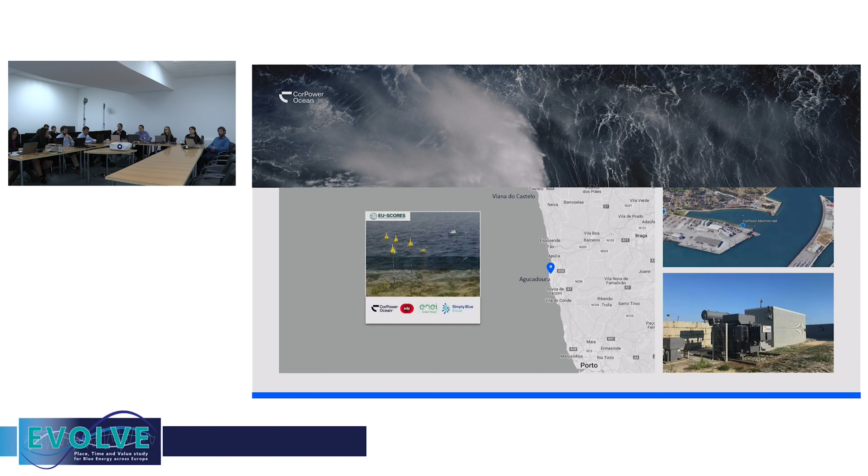So at CorPower, we have approached this challenge by really trying to understand what has been learned before, but also, what are the key challenges? And the way we look at it is you need to survive the storms, and you need to maximize revenue to cost. And the way we do that is we are developing a 5-stage program. We are now in stage 3, which is a full-scale grid-connected device in Aguçadoura in Portugal.

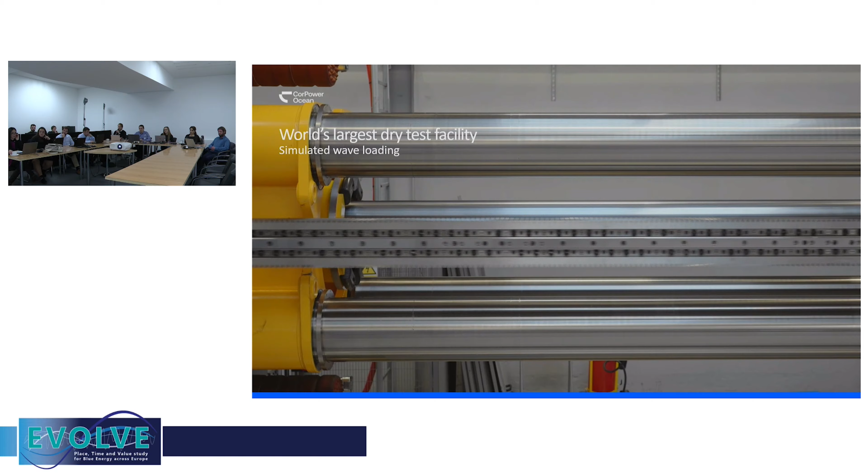And in Portugal, we have also developed what we call the mobile factory. So it's this type of manufacturing cell where we can manufacture the hulls and do the last integration of the PTO and hull, and then also use it as an O&M facility. Prior to this, we've done extensive dry testing in the world's largest dry test rig for wave energy. For about 1 year, we really pushed the power takeoff system and tried to break things and get the control system stable, etc., before we install it in the ocean.

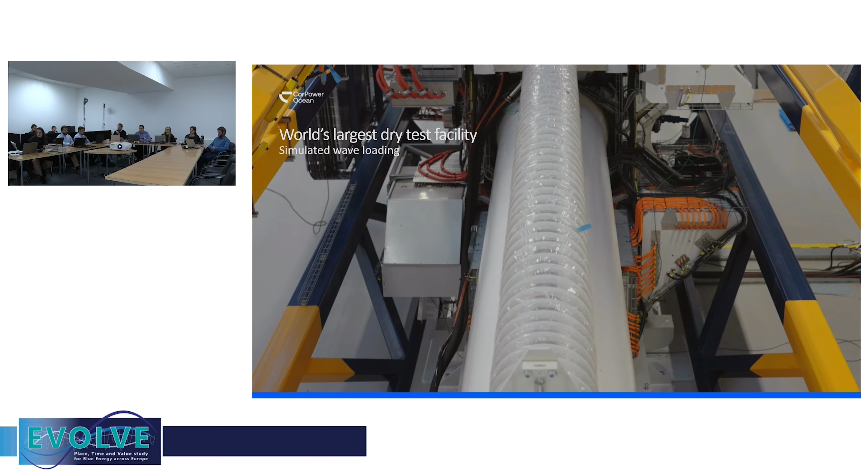And we have also installed the balance of plant, so anchor and mooring and new cables at the test site. And we have integrated the PTO into the hull in Viana. And it's currently sitting on the quayside up in Viana do Castelo. We've been waiting for weather windows, and it's ready to deploy. So I think by this, we just want to say that wave energy has come a very long way, and we are very close to commercializing wave energy to really get to a 24/7 renewable energy mix in the future.

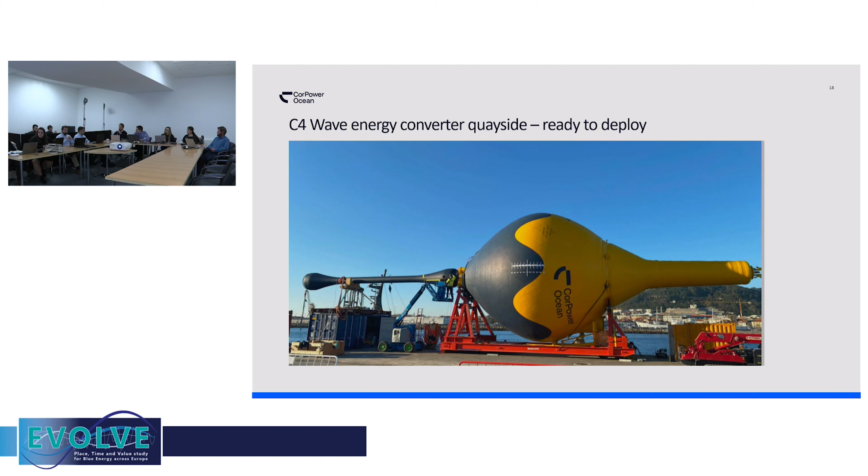So thank you. And I will hand over to James at Orbital. Thanks very much, Anders. So if you could just move on to my first slide.

Yeah, next one. So today I've got 5 minutes, so I'm just going to focus on the recent highlights for Orbital Marine Power, and some active projects we're involved in that really complement the objectives of the Evolve project and the wider commercialization of tidal energy. Next slide, please. So we've been developing our technology since 2002. But where we are now, we have the world's most powerful and largest tidal stream turbines. And over the next few years, we're going to be really seeing large-scale deployments of the technology, hopefully in line with the projections within the Evolve project.

Next slide, please. So this is our O2. This was launched in 2021 from Dundee. I think it was one of the first or one of the last vessels launched there since the 1970s. So really illustrating some of the economic opportunities associated with building our tidal turbines as well.

Next slide, please. So in the Evolve project, we focused on the grid systems modeling at a UK level. I just wanted to highlight that tidal stream energy is an entirely predictable renewable resource. It's got wide-scale application right throughout the world. So the conclusions of the Evolve project will have wide-scale replicable potential for a number of key regions right throughout the world in terms of decarbonisation and grid systems benefits.

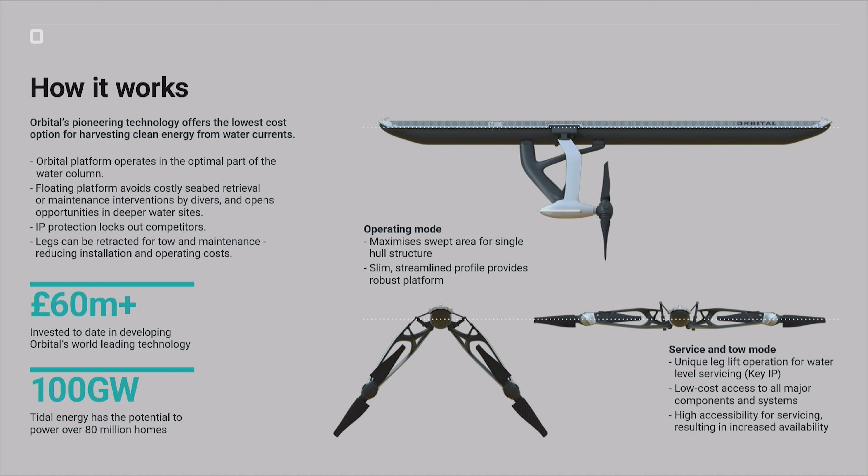where we can have that ease of access and low-cost maintenance. We have retractable legs now with the O2 that we can lift above the surface for ease of access to the nacelles and the pitching hubs, so all of those systems. And we can mount the rotors in the higher part of the water column where the tidal currents are the fastest for greatest tidal energy extraction. We've invested about £60 million to date in our technology, not including active grants and active initiatives. And as I said previously, there's a huge potential market of over 100 gigawatts globally for tidal stream energy. So an entirely untapped but vast renewable energy resource.

Next slide. So, recent highlights. We launched our first large-scale, commercial-scale turbine, the SR2000, in 2016. That was at times meeting up to 25% of Orkney's electricity demand.

It was installed at the European Marine Energy Centre there. It validated the technology approach at full commercial scale, and allowed us to raise funding, including from the Scottish Government, for future optimizations and future units.

So we launched the O2 with Horizon 2020 and Scottish Government funding in 2021. That's installed at the European Marine Energy Centre now in Orkney, and performing very, very well. And it's really demonstrating the more optimized commercial offering associated with our tidal technology.

Over the next 3 to 4 years, really what we want to do is continue to innovate on the technology. We're really now starting to build that global pipeline of new commercial projects in line with the predictions associated with the Evolve project. Next slide.

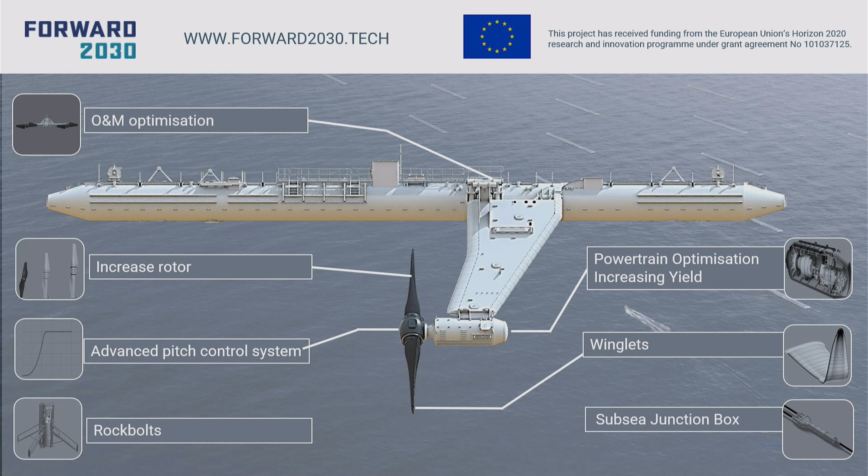So I'm just going to focus on 2 active initiatives we're involved in that complement the Evolve project. The first one is Forward 2030, in association with partners like SKF, University of Edinburgh, EMEC, Laborelec, and others. And really, this is about, firstly, continuing to innovate and drive down the cost of the technology. We're not keen on these long learning rates to get the costs down.

We want to maximize benefit to the taxpayer, really get those costs down through innovation as fast as we can. So we've picked 7 priority cost reduction innovations to focus on in the next project to reduce our generating costs and the cost of the sector by a further 25%.

Next slide then. And we're doing all of this with respect to future energy systems. So when I say that, we're envisaging, and this again complements the Evolve project, but at a project level, looking at decarbonizing other sectors, looking at not just exporting to the grid, but doing that in a grid-friendly way, making best use of the grid, and then also considering synergies with other harder to decarbonize sectors such as transport. So looking at hydrogen production as well, and how to balance all of that and how to manage that as part of an integrated project.

So again, looking more at the project level, whereas Evolve looks at the wider systems level and amalgamating all of those benefits. So I've got one final slide. And another project we launched last week is the MaxBlade project. This is another Horizon Europe project, a €10 million award from Horizon Europe and the UK Innovation Agency.

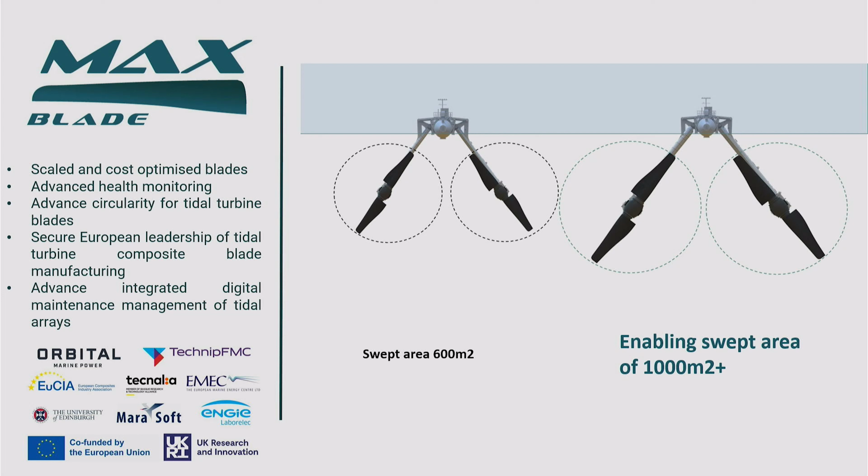Over the next 2 to 3 years, we're going to take all these innovations and implement them into a single core product, and really focus on that wide-scale deployment as in the Evolve project, and really realizing those economic benefits, those grid systems benefits, and the wider societal benefits as well.

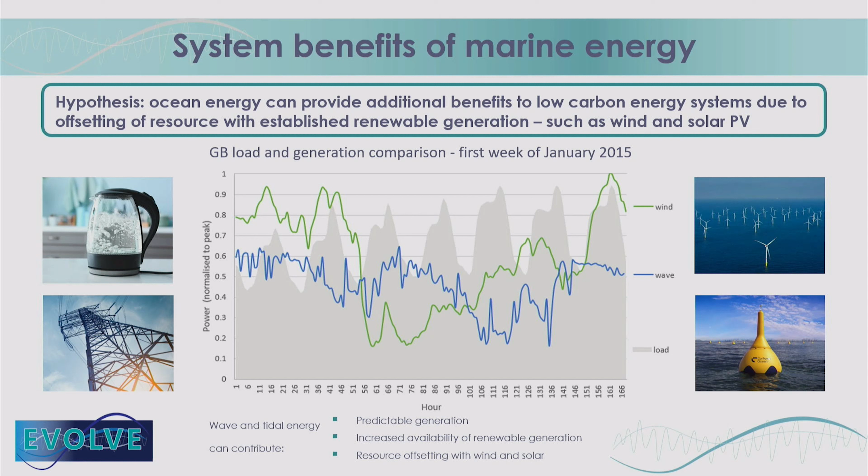We were trying to answer whether ocean energy, wave and tidal energy, can provide additional benefits to low carbon energy systems. So we all know that both wave and tidal energy are predictable, or at least more predictable than other sources. We know that if we include them into the system, we will be increasing the availability of renewable generation. And we also know that they have a nice offsetting with wind and solar.

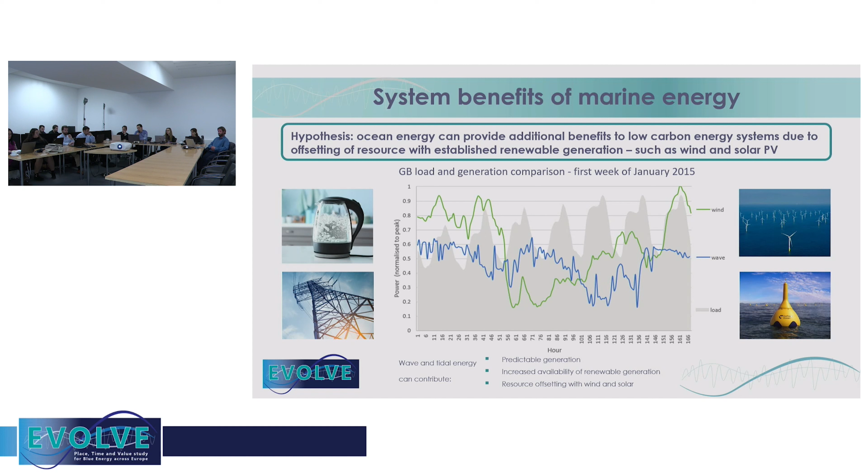So what we try with this project is to answer the question of how much of a benefit we will get from there. Which are those benefits, and how can we quantify them? So for that, as Miguel explained at the beginning, we created a consortium.

We applied for funds to the OCEANERA-NET COFUND second call in 2019. So we are 6 different companies from Scotland and supported by Scottish Enterprise. Aquatera, which is an environmental company and technical consultancy, is leading the project, and also working together with the University of Edinburgh and Orbital. With the support of the Swedish Energy Agency, we have CorPower Ocean and RISE Research Institute. And then for Portugal, of course, we have WavEC, who are kindly hosting the event today.

So we've been working in this project for 25 months now. We started back in January 2021. The project has an overall budget of around €1 million. And we've been delivering 7 different work packages with 22 deliverables and 50 milestones, the last of which is this webinar we are celebrating here today.

So to answer that question, we did 3 different types of modelings that we will be explaining now in detail. We work on a spatial modeling led by Aquatera, also with the support from WavEC. There will be some results shown also, of course, on the power system modeling done by the University of Edinburgh and RISE, and some microgrid studies led by WavEC. We will have now a specific section of the presentation focused on each of those modelings.

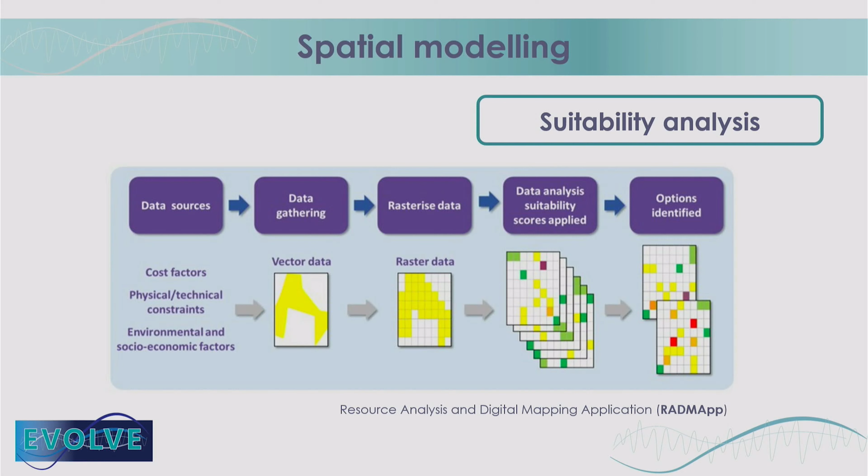And we also have to deal with data that comes as text, which might be able to be represented spatially from coordinates that are in that text, but also data might only be available in a digital image or a map, which we then have to look into digitizing. But what is uniform, however, throughout all this is that all the data that we use has to be represented at this 250 meter resolution raster grid. And once that data has been uniformly rasterized, then the analysis can begin and the model run. Next slide, please.

So each data set you see there is rescored according to the instructions provided by the score sheet. And that determines whether there's any impediments to development, or if development is possible, the level of suitability for development. The model employs a multiplicative approach. So suitability scores are assigned on a scale of 0 to 1. So some data will impact on development's potential in a purely Boolean way. For example, the presence of a pipeline might be an absolute barrier to development.

So in that case, cells with a pipeline in them would be assigned a score of 0, and those that don't have a pipeline in would be assigned a score of 1. So in effect here we're saying cells are either yes or no to development. Other data though impacts in a different way and has to be scored in a different way. So if you're thinking about bathymetry, there are water depths that are too shallow to accommodate a device, and we know there are depths that are too deep to feasibly anchor a device. So in these areas, a score of 0 is applied, because again, it's not possible.

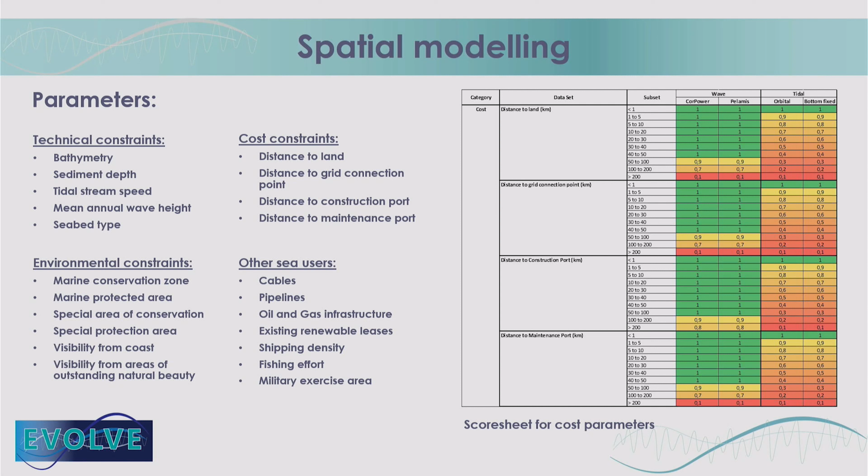So once all the data layers have been reclassified based on the score sheet, each layer is introduced to the model and all the layers are multiplied together to provide an overall suitability value, as you can see on the right-hand side there. So because of the nature of a multiplicative approach, areas deemed as a barrier to development, so those that are assigned a score of 0, will rule out any areas, even if every other factor that's gone into the model is 100% suitable. Just one unsuitable score of 0 will wipe that area out completely.

So the area scoring 0, which the key probably isn't legible on your screens viewing the webinar, but the areas that are blue in the waters around there are what we would determine to be not developable. But the other areas that are in there have some level of suitability, with the areas getting towards the reds being the most suitable. But I should point out that anywhere that's not that brightest blue has some level of potential.

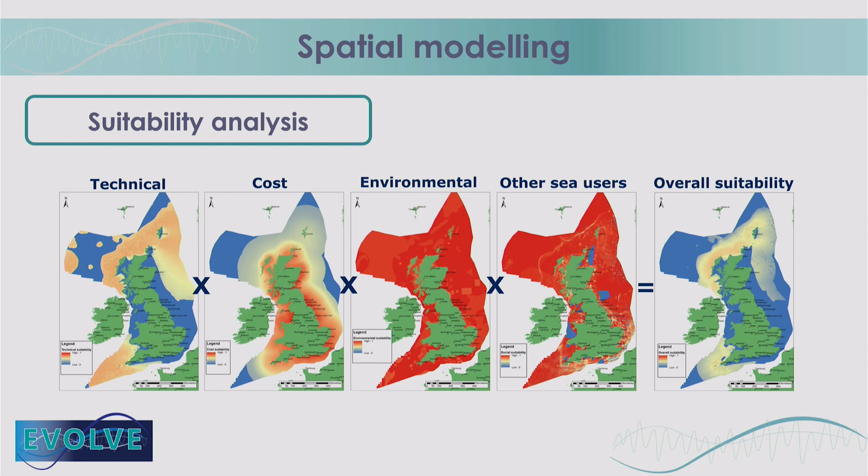Okay, next slide, please.

So one of the biggest challenges we had within the spatial modelling was determination of resource potential for both the wave and tidal stream. For tide, previous spatial models that have been created for countrywide levels have produced outputs that are quite coarse in resolution and can be quite poorly resolved or even missing data when they come close to the coast. And given that the majority of tidal streams are in channels and off headlands that are close to the coast, this isn't particularly great.

So to supplement the existing tidal models, we've over the years collected data from various nautical charts and sailing almanacs, etc., to supplement where potential tidal areas might be.

For wave, it's also true that these countrywide models are pretty poor resolution and lose resolution and miss data close to the coast. And also for wave, unlike with tide, there's not that direct relationship between the speed of the water and the power output. With wave, there's a combination between the wave height and the wave period. Previous models for wave normally provide us with maybe an annual wave height or an annual wave period, but that doesn't really give us the best way of calculating potential power output from a device.

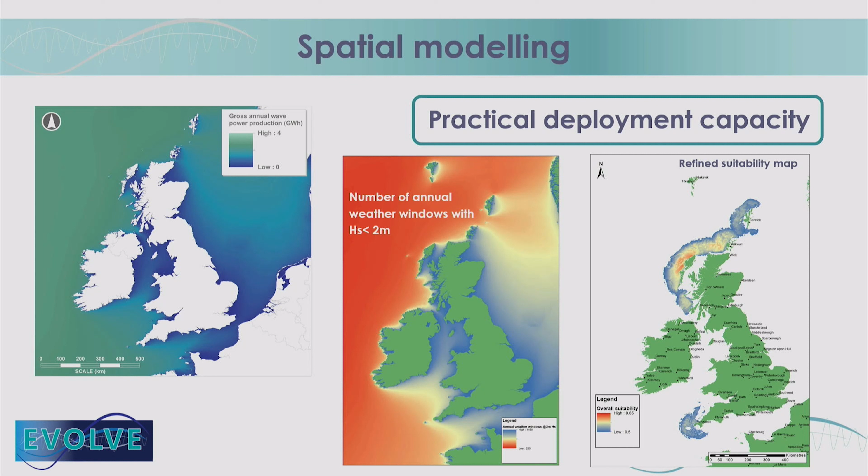The same with the tide, we can't just completely block off the tidal stream with lots and lots of devices. So we had to take into account device spacing and how much energy could be extracted from the resource. That was then used to define final areas for development and gives an estimation of potential installed capacity for the various regions. Next slide, please.

Okay, so this is now getting on to the results from the spatial modelling. So this is for Britain.

So this just breaks down the map on the left here. It's showing us the potential areas for wave development, and based on what I was just saying before about picking the top sites and where the wave resource could be captured, we were coming out with the following figures here in the different areas around the British coastline.

So going from north to south, we've got to the west of Shetland, west of Orkney, Lewis and Cape Wrath up the northwest there of Scotland, the Outer Hebrides, the southern Inner Hebrides there just above Ireland, and then coming down to the southwest around Cornwall and the Scilly Isles. So that gave us a total installed capacity of just short of 25 gigawatts for British waters. Next slide, please.

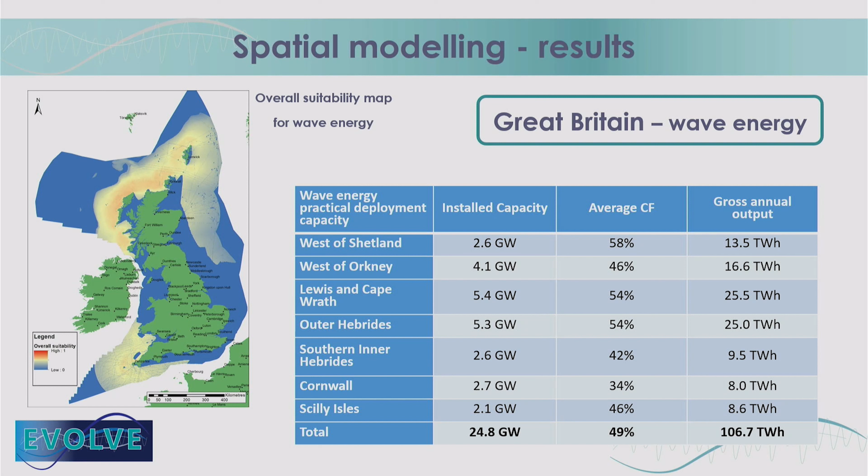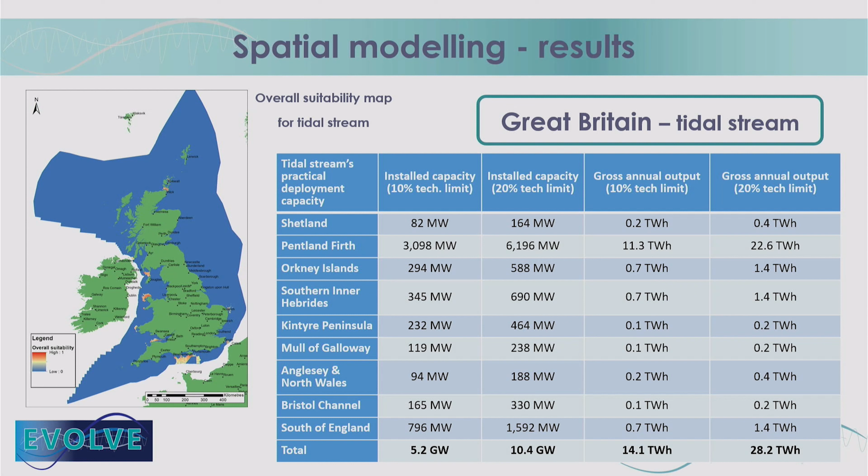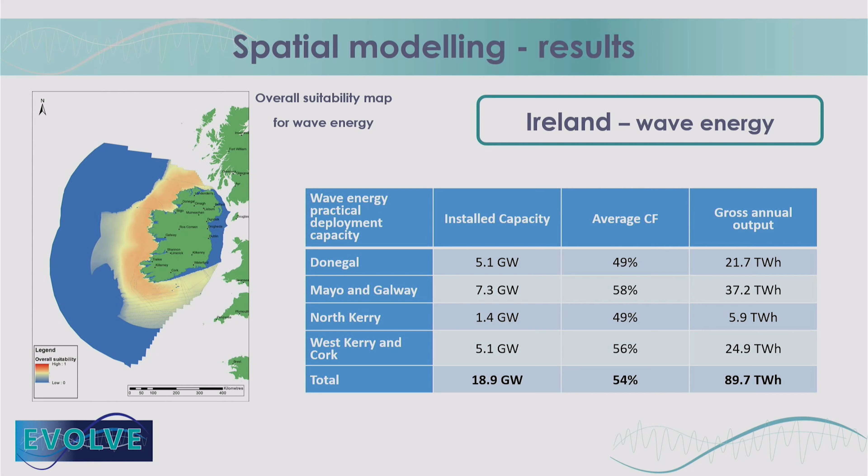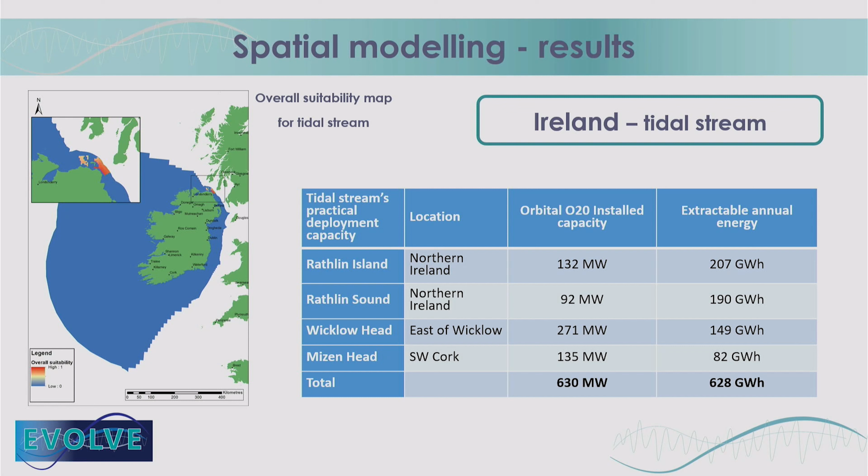They're quite small areas around Wicklow and southwest of Cork, but we're getting around 630 megawatts of installed capacity for Irish waters. Should say that there's potentially more capacity in parts of the Irish waters, maybe if we're looking at sea loughs, which we didn't look into as part of this study. Next slide. Okay, and finally Portugal.

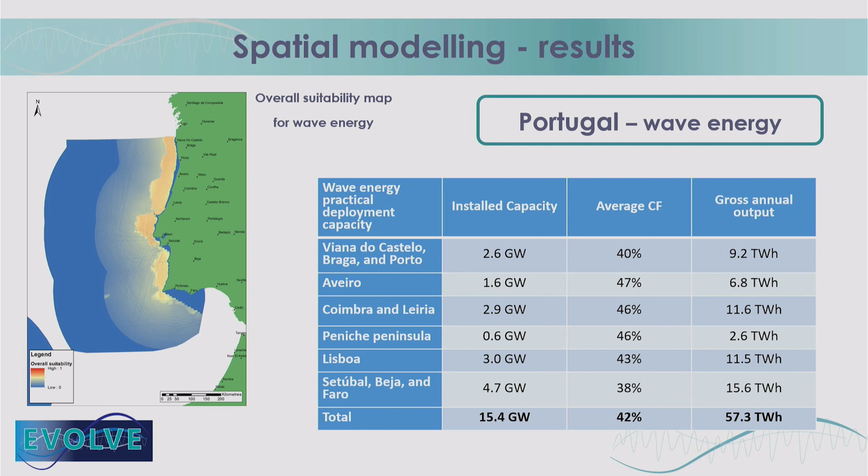I think that's my last slide for the spatial modelling that Aquatera did as part of the RADMAP. I think I'm going to hand over to Miguel now at WavEC to talk about their Oasis model. Hi. So I'm talking a little bit about the WavEC model. The Oasis model is our site selection tool.

So the model from WavEC uses cost functions to reclassify the aspects associated with different locations' characteristics, and basically it calculates the most suitable areas for wave and wind energies, considering the annual energy production, total costs of installation and maintenance, and taking into account the existing constraints on the different locations. During the Evolve project, we were able to develop the tool for wave energy and improve some of the cost functions that the tool uses.

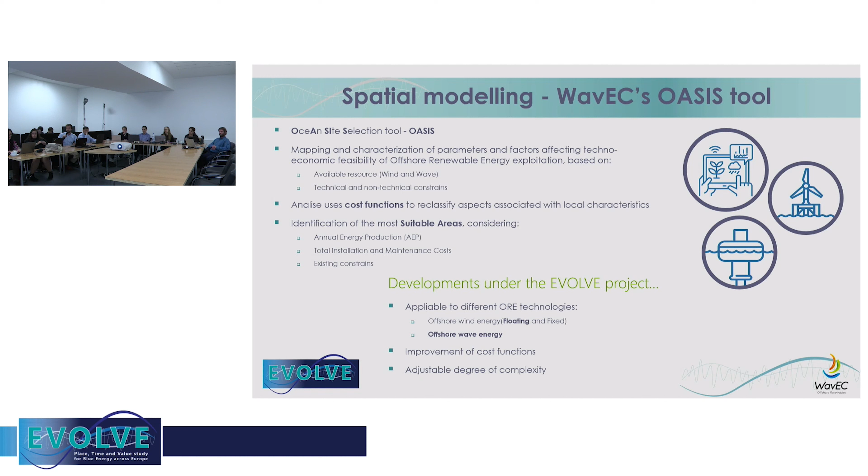So basically the cost functions calculate a suitability index that takes into account the total costs over the AEP, the annual energy production, and this total cost takes into consideration costs associated with the energy converters, the substations, the OPEX, mooring systems, the array cables, and the export cables. It also takes into account data associated with the water depths, the seabed sediments, the distance to ports, and distance to the grid connections.

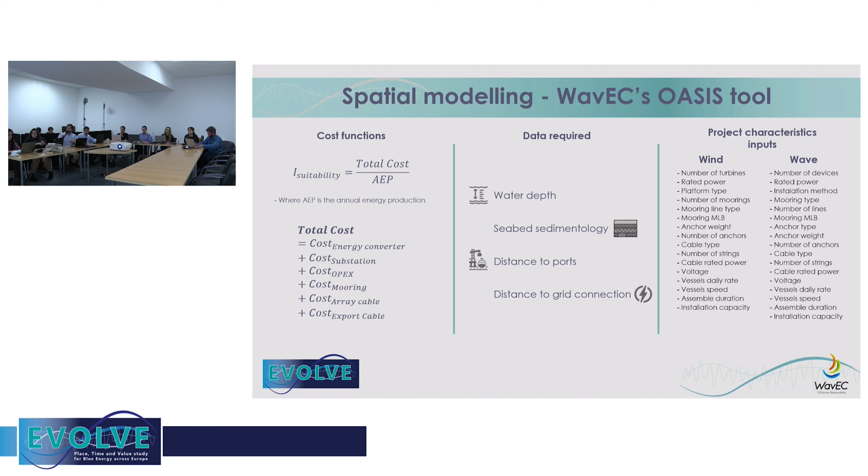And it also requires inputs from the projects. These are more specific to each project. And for wave energy, we can have inputs like the number of devices, rated power, installation methods, and so on. The different outcomes of the tool.

So the most important one is the suitability index that is going to give us an idea of the best sites for installation. But we can also have maps associated with the different costs of the different processes of the installation and maintenance process. We can have maps associated with the different constraints, and we can have final maps with the suitable sites, identifying the most suitable areas for the specific area under study.

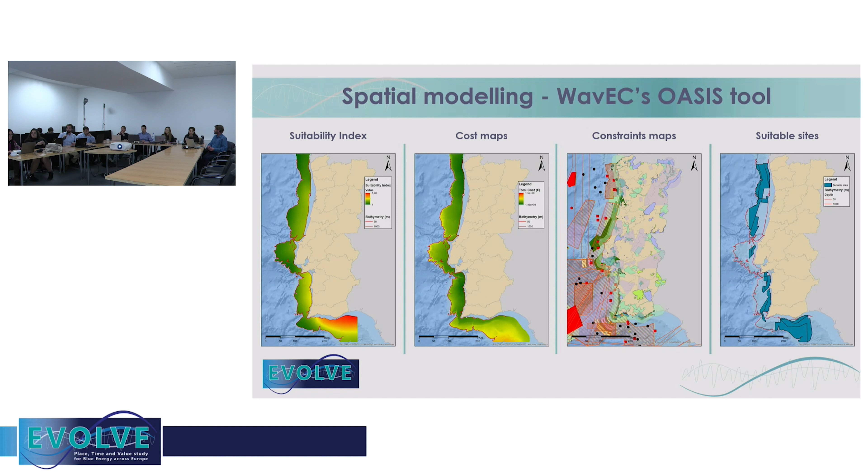And yeah, we are still developing this tool, and we are hoping to develop it for other sectors such as aquaculture, floating wind, floating solar, and improving all the costs and other aspects of this tool.

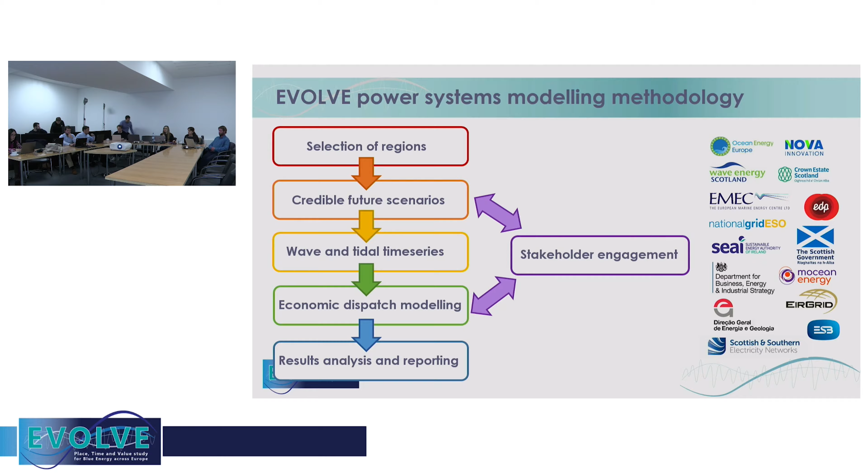So in terms of the power systems modelling we've been doing, I'm just going to chat through a little bit about our modelling methodology and the different steps that we took before then moving on to some of the results, starting off in terms of country scale studies. So as we said before, selecting regions, we looked at Great Britain, Ireland and Portugal.

We then looked at any potentially credible future scenarios for these regions. So we looked essentially at grid operators, at governments, all the analysis that had been done to see what the potential future energy mixes could look like in these regions all the way up to 2050. We also took a bit of time to analyse the wave and tidal resource, the hourly time series in terms of the availability of these resources for each of our regions.

And we fed all of these data, so the scenarios and the resource time series, into our economic dispatch models. Throughout all of this, we've been lucky enough to have quite a lot of stakeholder engagement. I've given just a few examples of some of the organisations we've been engaging with over the last couple of years. And thanks to everyone who's given us feedback. It's been really useful to get engagement from stakeholders and validate some of our assumptions and our modelling methodologies as well.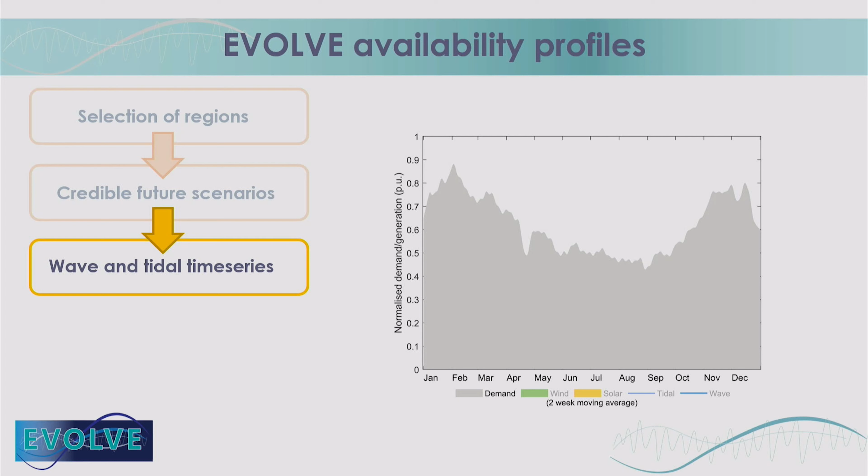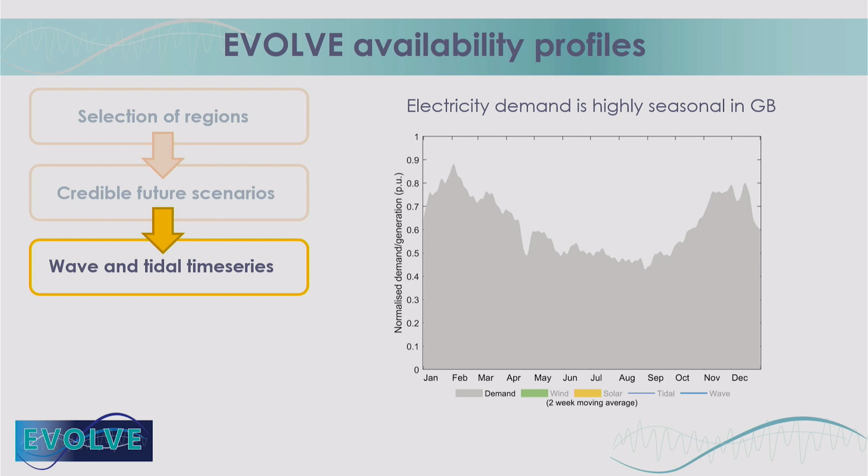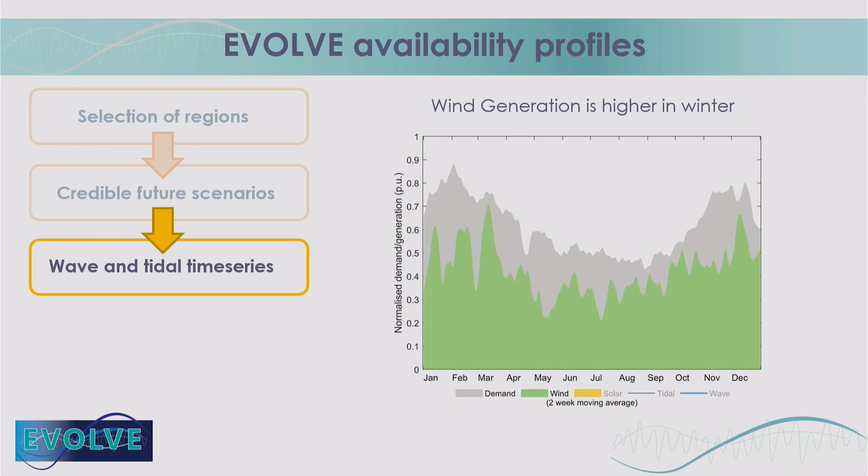So, for example, this graph here essentially shows the seasonal electricity demand. We have much higher demand for Great Britain in the winter months. It drops a bit in the summer. When we then compare what the normalized wind generation looks like, so we're comparing the seasonal profiles for these different technologies here, wind here is made up of both onshore and offshore wind for Great Britain. We see again that we have quite a seasonal resource here. We have much higher peaks in wind generation in the winter months, and our lowest troughs in the summer months.

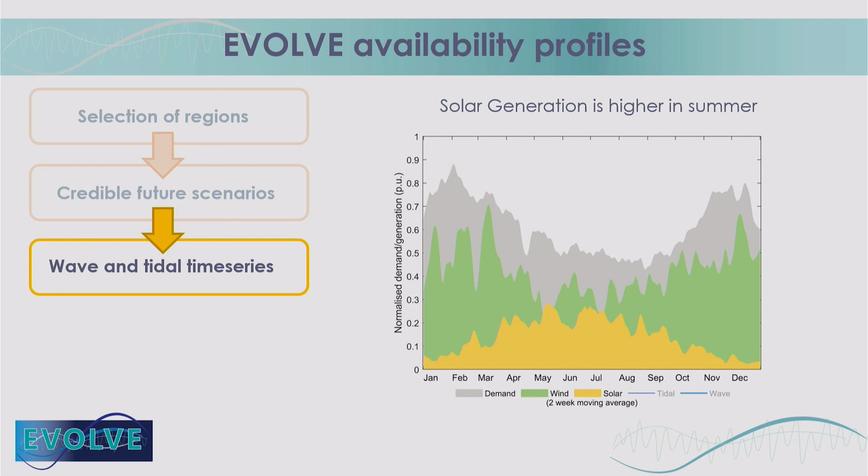Solar obviously is the other way around. We get a lot more light, a lot more sun in the summer months in Great Britain. So we see that peaking in the summer and dropping off in the winter. And then we start to look at our ocean energy resources to compare these with the established generation that's already in our systems.

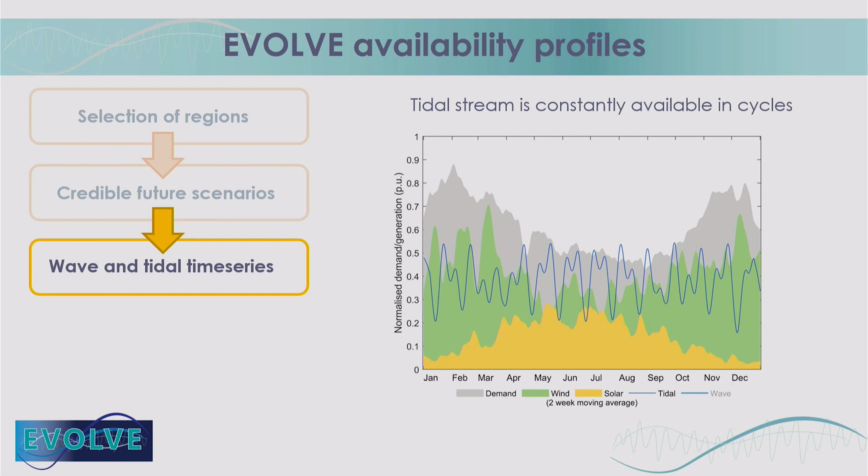What we can see is tidal stream is available more consistently throughout the year, it's predictable, and we can predict the cycles when tidal stream generation will be available. Wave energy we find is also much higher in winter. It matches our peak demand actually pretty well for this year of data for the UK system. What we do see is there are points where we could have, say, a high wave resource at a point when we have a low wind or solar resource, and vice versa as well.

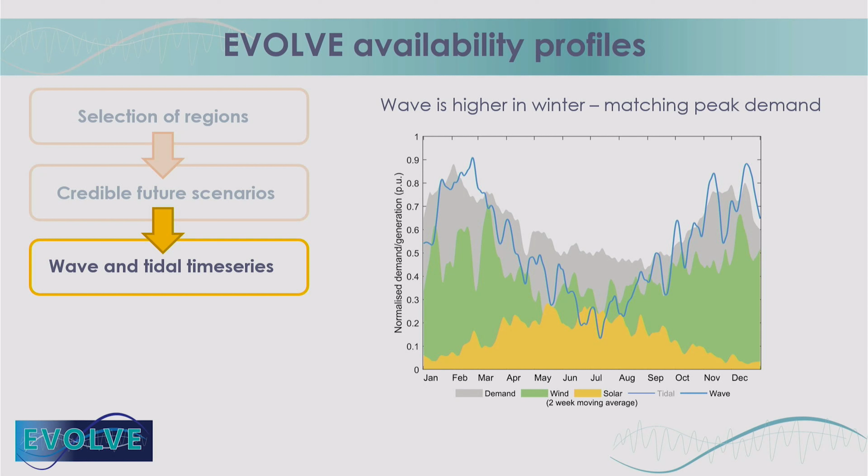So as we've highlighted in this webinar, the key hypothesis of the work really comes from the fact that these resources are offset, and potentially a more diverse mix, which includes both wave and tidal alongside wind and solar, could be better suited to meet our demand profiles than just one of these technologies in isolation.

So once we've collected all this data and understood why it's interesting, what we then did was feed it into our economic dispatch model. We used open source software called PyPSA, Python for Power Systems Analysis. This software computes hourly optimal dispatch. So for every hour of the year, for selected years, we're essentially trying to meet demand with supply at the cheapest cost. Generation can bid in at its short run costs, for example, taking into account fuel costs and operational costs of generation. And this represents wholesale market operation.

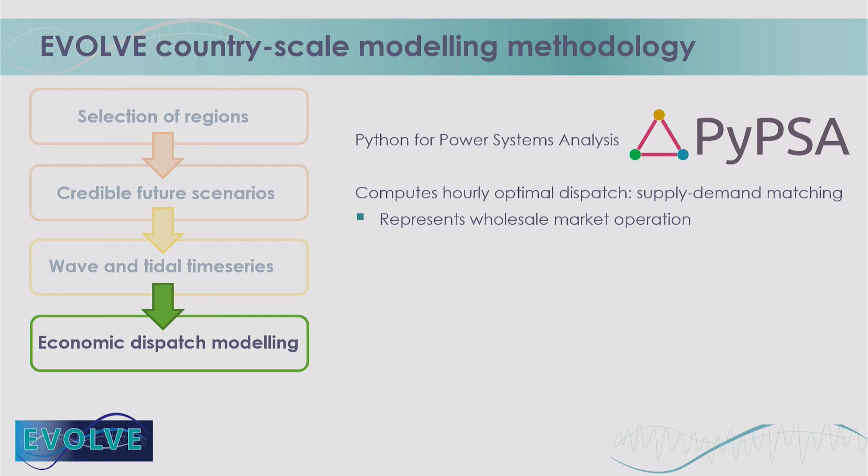So I'd highlight in this part of the power systems modeling, we're not representing any capital costs or investment costs in the system. What we're looking at is specific years, for example, 2030, 2040, 2050. We've taken an established mix from a credible future scenario. And we're adjusting the amount of wave and tidal generation within that electricity mix, and looking at how that impacts on system operation and dispatch.

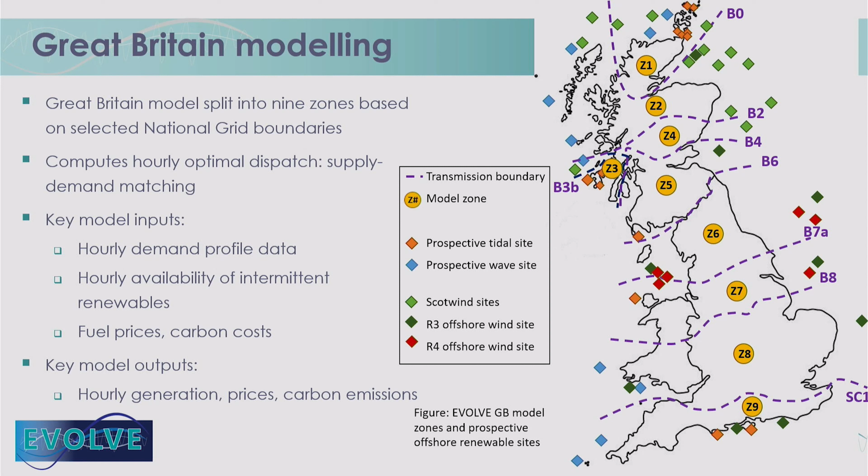And we used the hourly availability of intermittent renewables, so wind, solar, wave, and tidal, again from the same year, so using the exact same base year of data to capture the correlation between these different technologies and with demand as well. We also used fuel prices and carbon costs taken from the UK government electricity cost projections. Our key model outputs are the hourly generation, the hourly dispatch of different technologies that the model chooses to dispatch to minimize costs. We look at how that changes in one scenario without any wave and tidal generation, and then a scenario as we increase the amount of wave and tidal in our mixes.

So what do these results look like? This shows our results for Great Britain. So wave results are on the left-hand side of this plot, tidal results are on the right-hand side. At the top, we've got our cost, and what we've done here is just shown the change in dispatch cost between a scenario with no wave and tidal, and then our scenarios as we increase the proportion of wave or tidal energy into the GB system.

So what we are seeing is, for each of the different years that we've been looking at, 2030, 2040, 2050, as we increase the proportion of wave and tidal in our system, dispatch costs overall are steadily reducing as we're increasing the ocean energy technologies. And this is because, as I mentioned, we're able to displace more fossil fuels. We can see in the lower two graphs, we're also reducing the amount of carbon in the system. And that's because we're displacing more carbon-intensive generation, potentially more expensive generation in our system as well. And on an hourly basis, we're able to use more of our renewable energy at the time that it's available, and therefore reduce our total dispatch costs for our system.

So just to pull out a couple of figures from these graphs, after 10 gigawatts of wave energy, for example, we see up to almost £1.5 billion reduction in dispatch costs for the year. And we see around a megaton, so 1 million metric tons of carbon dioxide reduction as well.

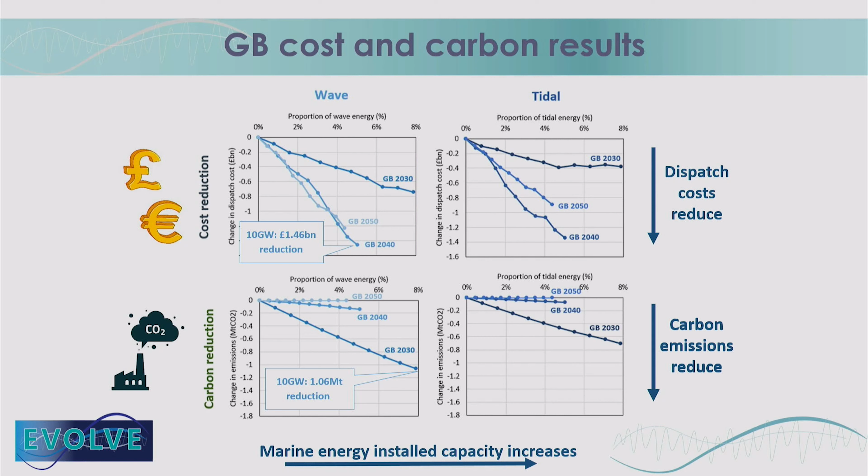I think that might be... Oh, one more slide from me, and then I'll pass on to Elena to talk about our Ireland and Portugal studies.

So another thing we're able to do, as I mentioned, our modelling represents our wholesale market. We're able to look at which technologies can capture which prices, so when technologies are available, looking at the marginal price, representing our wholesale price for every hour as a result from our modelling. What we are seeing in these results, again for every year we've been looking at, these are GB results, is wave and tidal able to capture higher prices than solar and wind.

And this is essentially because there's a lot of wind and solar already in our systems. When that is available, it tends to depress the overall price of electricity. But wave and tidal are able to be available at times when potentially we have more expensive peaking generation or fossil fuel in our systems. And therefore, in the short term, as we increase penetration up to 1, 2, 3, 5%, we're able to see these technologies are able to capture higher prices.

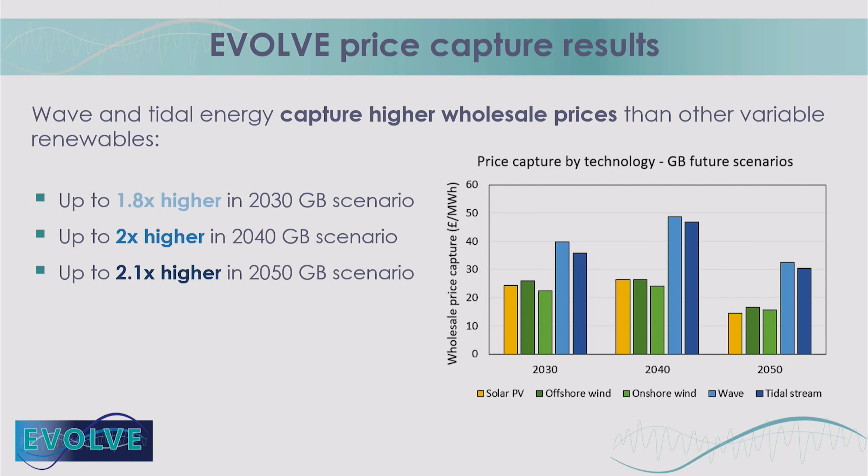So yeah, I'll pass on to Elena now, who'll talk about the Ireland and Portugal modelling. Thank you, Shona. I'm Elena Vardanyan from Royal Institute of Technology, and as it was mentioned before, we have been also modeling Ireland and Portugal.

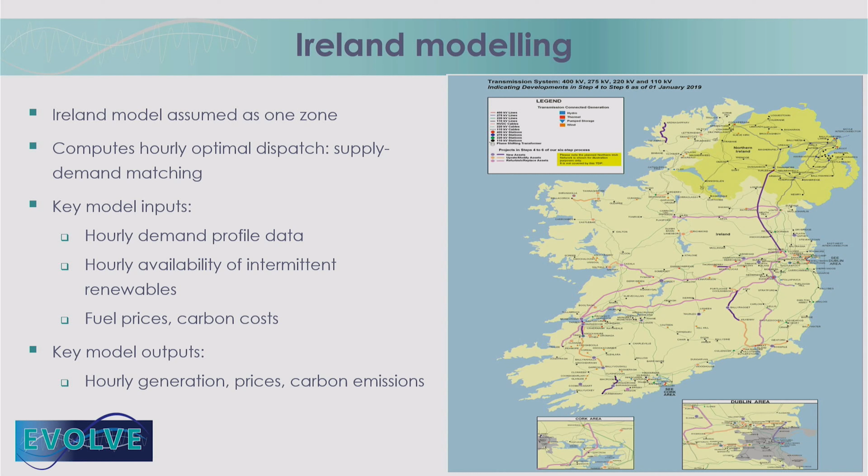So for Ireland, an economic dispatch model has been developed, considering Republic of Ireland and Northern Ireland as one zone. We have chosen 2030 and 2040 as reference years. For the economic dispatch model, input data has been collected and gathered: time series for hourly demand for Ireland, time series for renewable energy resources with hourly resolution, fuel cost, carbon cost, and of course key model outputs are marginal prices, carbon emissions, and hourly generation.

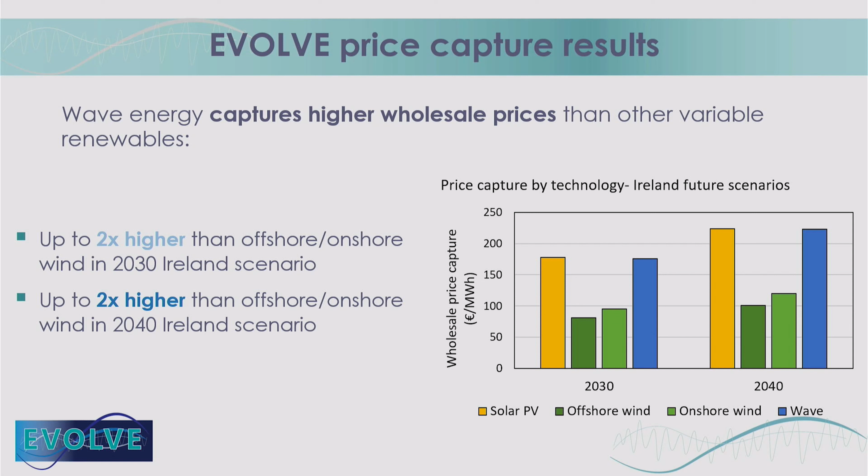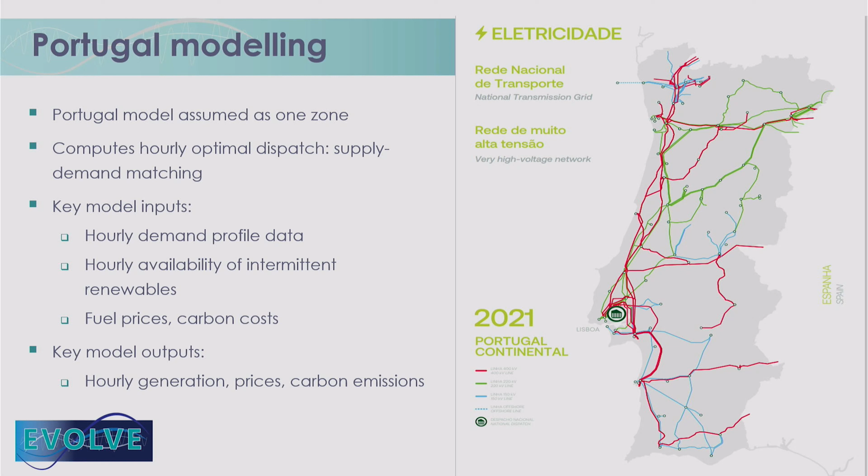In a similar way, an economic dispatch model has been conducted for Portugal, assuming Portugal again as one zone. For Portugal also, 2030 and 2040 have been chosen as reference years. Again, for preparing input data, we collected hourly demand data for Portugal, time series for renewable energy sources, again with hourly generation, fuel prices, carbon costs, and as key outputs, we were looking for marginal prices, hourly generation, and carbon emissions.

For Portugal also, we have been conducting multiple simulations, continuously increasing the proportion of wave energy in the generation mix, and then recording carbon emissions and dispatch cost. The figure on the left-hand side again shows the change in dispatch cost while we increase the proportion of wave energy, and the figure on the right-hand side shows the change in carbon emissions. So again, for Portugal, while continuously increasing wave energy in the system, we record reduction in dispatch cost and reduction in emissions. And this behavior, again, is consistent in both reference years.

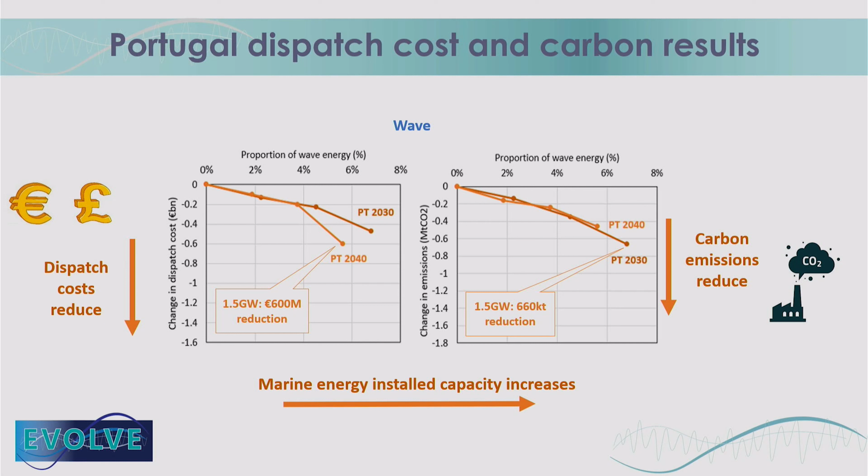Again, wave energy is capable of capturing high wholesale prices compared to other renewables, but for Portugal modeling, actually, this difference is not as sharp as it was the case with Great Britain results and Irish results.

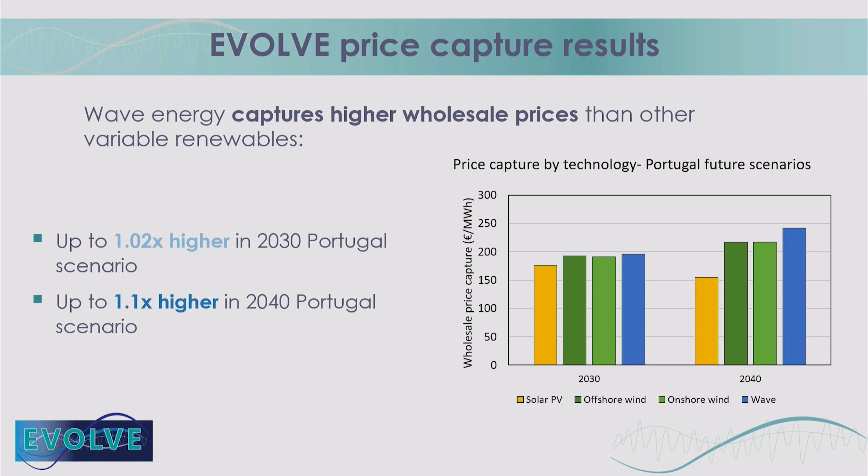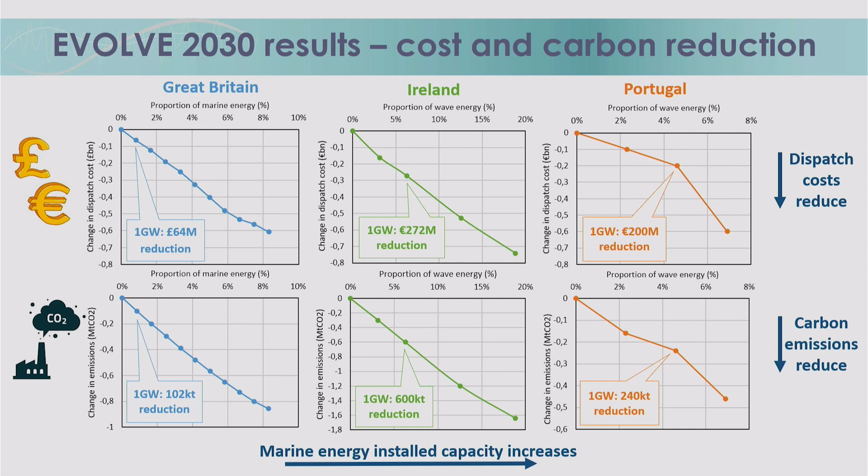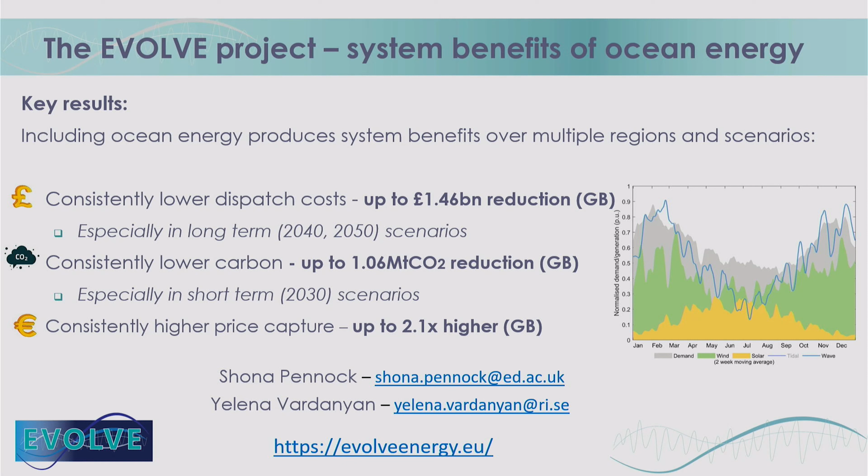So now I will talk a little bit about the microgrid modeling that studied the system benefits of ocean energies in islanded power systems. The objectives of this task in the context of the project were to find a mix of renewable sources that fully satisfy the electricity consumption in the Orkney Islands, minimizing the global cost, including investment and O&M, operation and maintenance.

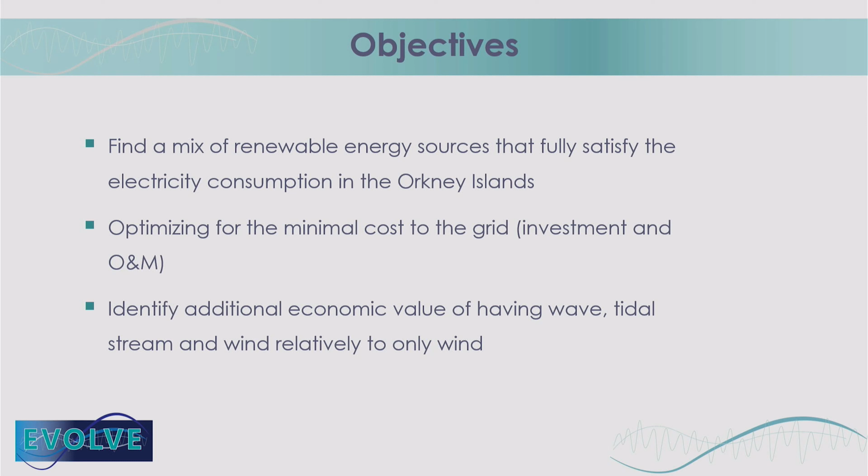And also, on the other hand, to understand the economic value of having wave, tidal stream, and offshore wind farms, instead of having only offshore wind farms. This work did not intend to suggest a detailed configuration for a grid, but rather to draw general high-level ideas of what the benefits of ocean energy are.

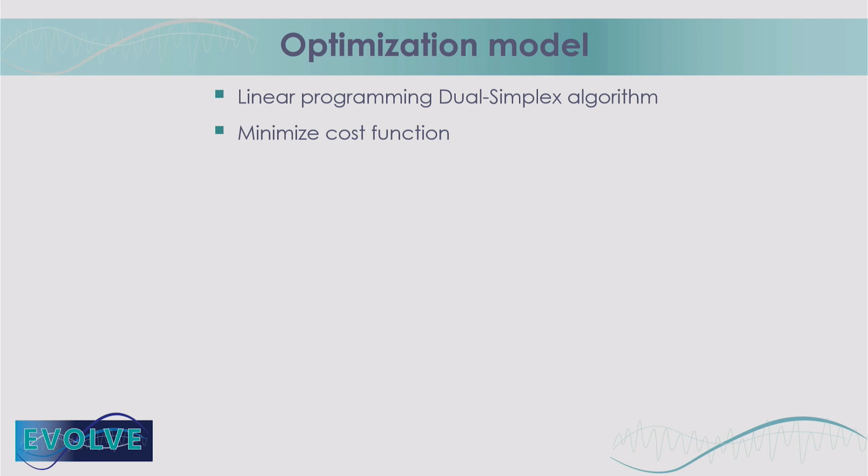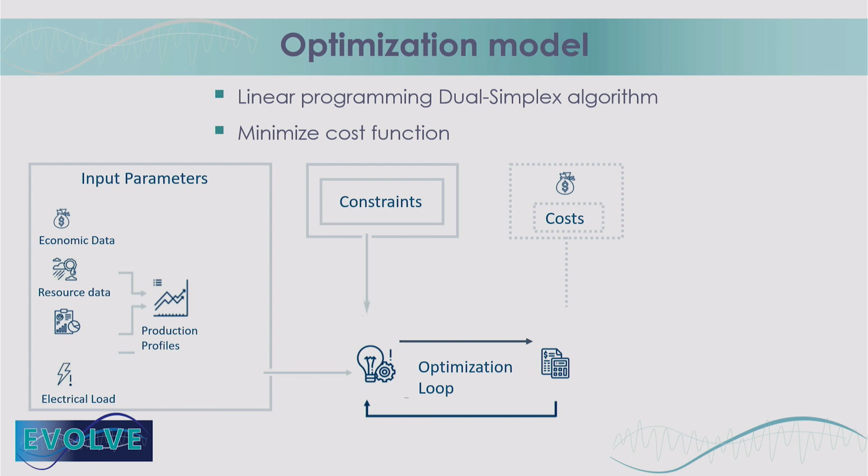So the optimization model consists of a linear programming code using the dual simplex algorithm, and it minimizes a cost function. As inputs for the model, we have the economic data, resource and technological data with which we can define the electricity production profiles, and the consumption data, the electricity load data. These inputs go into the optimization loop that also takes into account some constraints, and at each iteration the model calculates the cost for a given mix of renewable energies and electricity storage facilities.

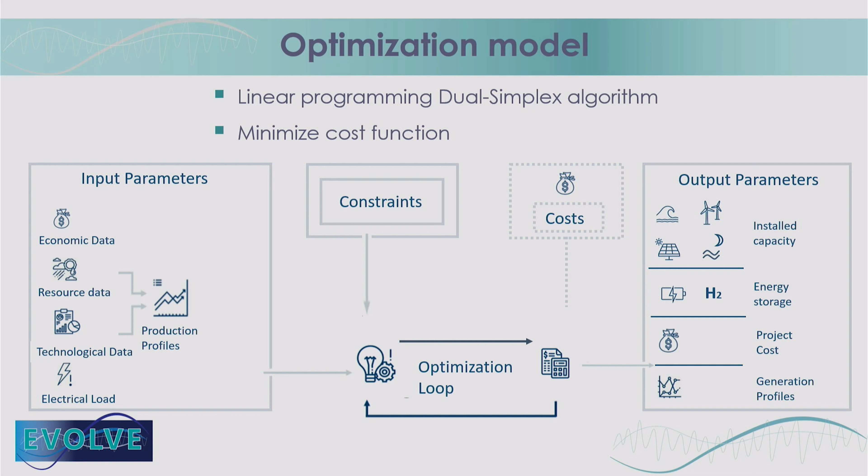The outputs will be the installed capacity for each of the renewable sources considered. We included wave energy, onshore and offshore wind, solar photovoltaic, and tidal stream. The output will also be the energy storage capacity, and we have considered lithium-ion batteries and also hydrogen. The global cost is also an output; it's the variable that we are minimizing, and it includes CAPEX and OPEX. We can also obtain the individual generation profiles of each source and the total generation profiles.

Regarding the inputs, for the consumption, we considered hourly data for 1 year, and as a simplification we kept this same profile for 25 years. This profile was based on Great Britain's consumption for 2019, and then scaled down to the Orkney Islands. For the future years, a multiplication factor was considered, which was also obtained in the EVOLVE project by the University of Edinburgh.

Regarding the generation, we took some references such as the Renewables Ninja site, also Copernicus to obtain some resource data, developer data from CorPower and Orbital, and also the TETIS model from the University of Edinburgh and Plymouth. Shona, correct me if this is not correct.

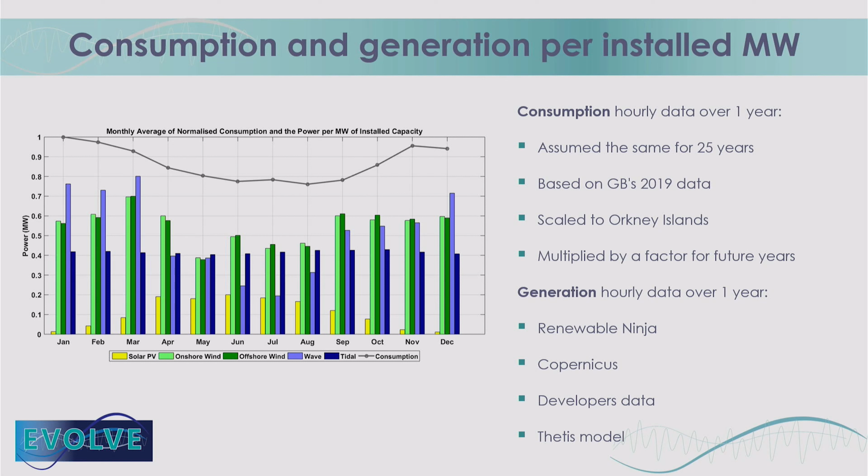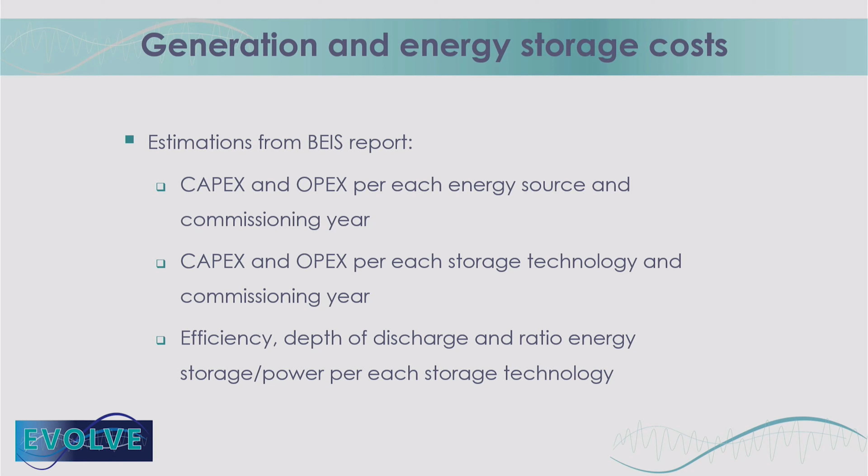Regarding the costs for the generation technologies and the energy storage equipment, we based them on reports from the British Department for Business, Energy and Industrial Strategy. These provided estimations of CAPEX and OPEX for the technologies that produce electricity and for the energy storage facilities. These reports also took into account some scenarios, and specifically for energy storage we had the efficiency, the depth of discharge, and the ratio of the energy storage capacity to the power of the storage system, and this ratio was kept constant in the model. It was also a simplification.

Also, we have considered 4 scenarios that take into account different renewable sources. There is land that takes into account solar photovoltaic and onshore wind. We have ocean that considers wave, tidal stream, and offshore wind. We have a case only for offshore wind, and then a scenario that considers all the previous renewable sources that I mentioned.

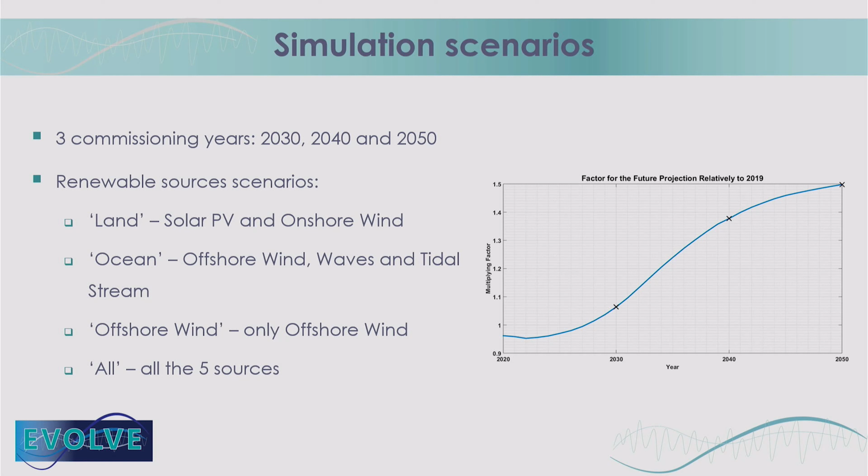One thing that we can also verify is that in the scenario with all the renewable energies, the share of wave and tidal increases significantly over the years because their cost also decreases more than for the other technologies. It has around 17% in 2030 and up to 43% in 2050. And I think this is quite significant.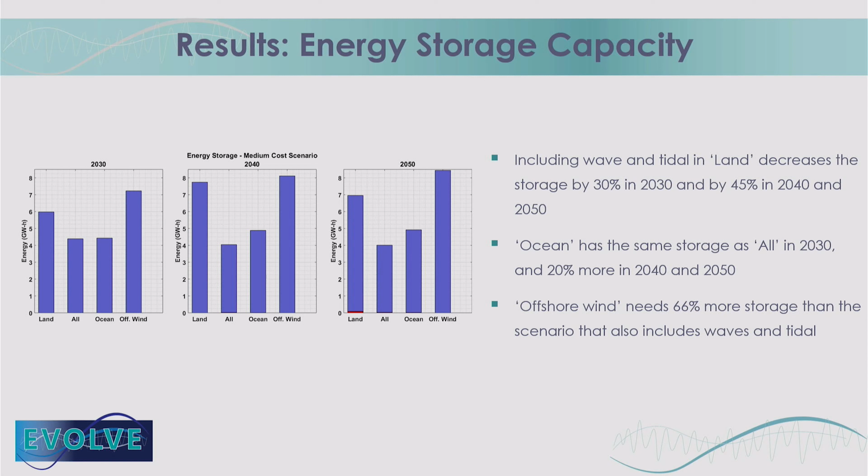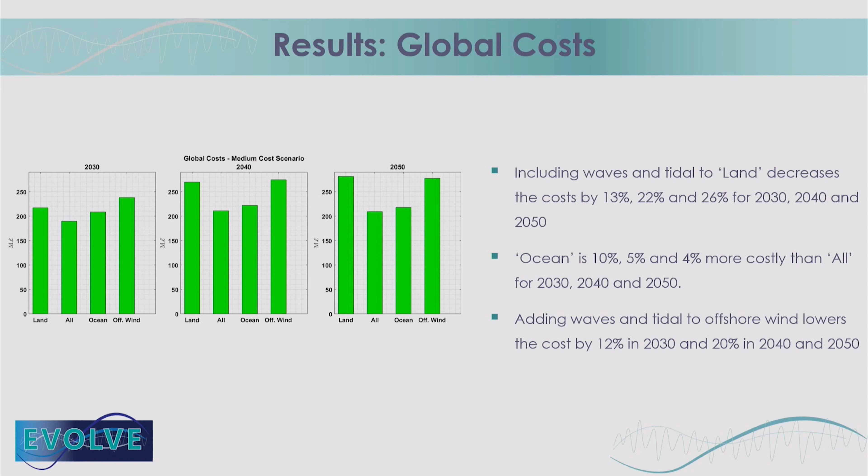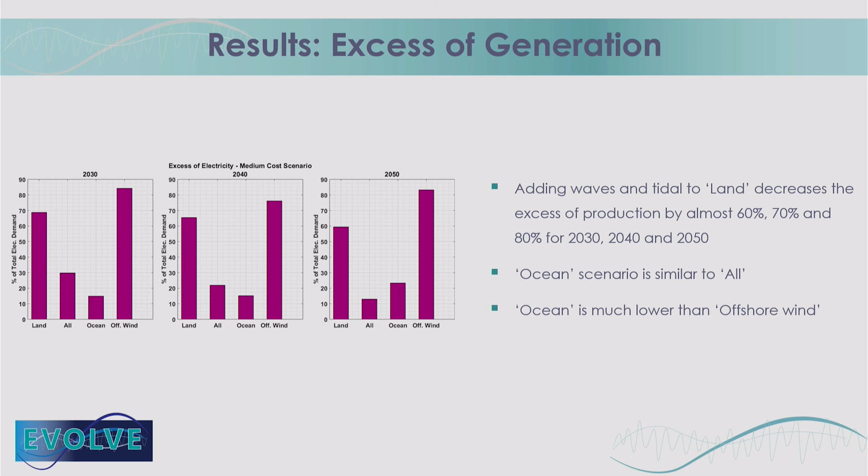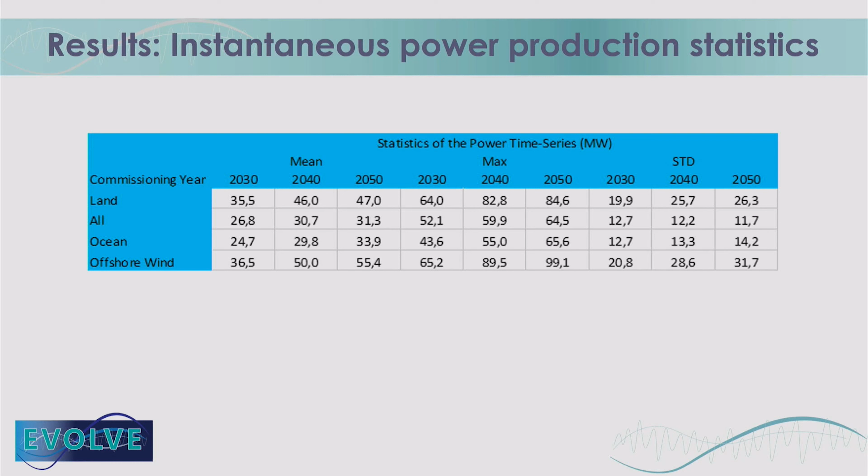The same for the maximum value of the instantaneous power. Including wave and tidal, it's again significantly lower than the other scenarios. And again, the variation, represented here by the standard deviation, is also quite lower than the case of having only the land renewables, and even lower than having the offshore wind only.

So, as the main conclusions of this work, it was possible to identify that the complementarity of the production from wave and tidal brings some benefits to the system. We could have less total installed capacity and less energy storage requirements, and these two together lower the costs. We also have less excess of production.

Also, another thing. This is not quantified in the model as it is implemented now, but if we have less installed capacity and less energy storage capacity, this will result in a lower carbon footprint and carbon emissions. And we also concluded that the instantaneous power, as I just showed, is less demanding for the grids.

So now I will give the floor to Donald Noble from the University of Edinburgh.